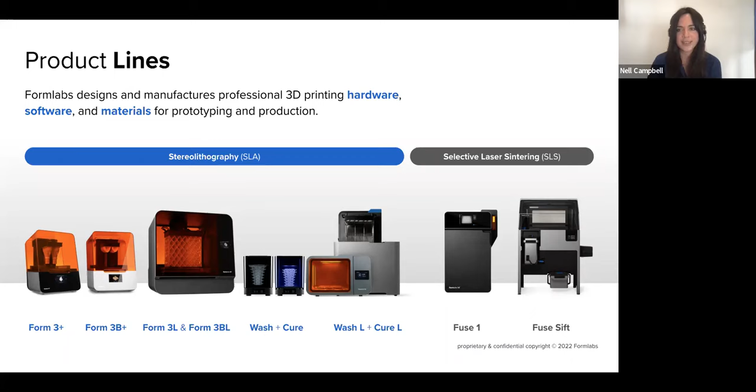So what is low force stereolithography? I thought for those who have been with Formlabs for some time, perhaps you have a Form 2 or maybe you go back as far as a Form 1 Plus, I wanted to just talk about what low force stereolithography is.

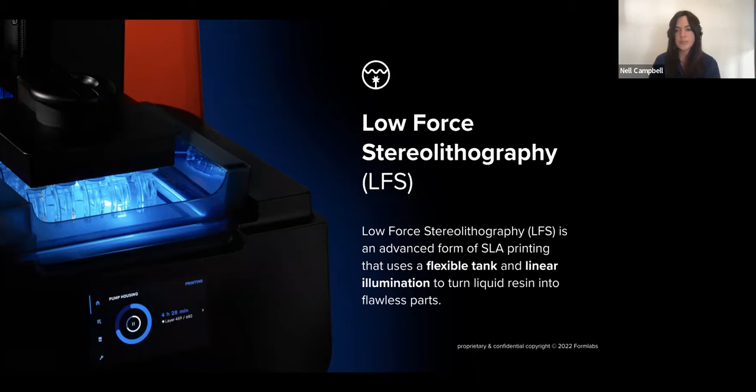So we have our full agenda for you today. We will first go into low volume rapid injection molding, and Juliette will present some use cases. She'll look into the workflow, so what is required to get started. Then we'll explore some user stories from around the globe, and lastly, we'll be looking at your questions live.

So we'll go into the presentation of low volume rapid injection molding. First of all, I just want to ask audience questions. We have a few polls throughout this presentation. The first one is around your familiarity with injection molding and whether you have injection molding capabilities in-house. That will appear on your screen now, please take a second to fill in the poll as it pops up.

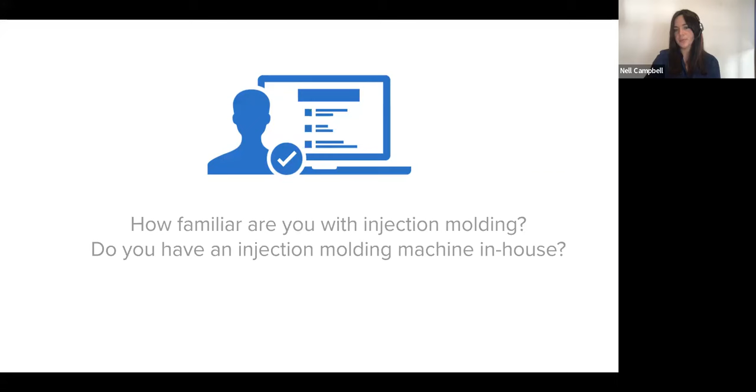Thank you very much. It looks like there's a real mix here. We have about 40% of you that are intermediate, a bunch of you that are beginners, so we'll try and cover all aspects of this in the presentation.

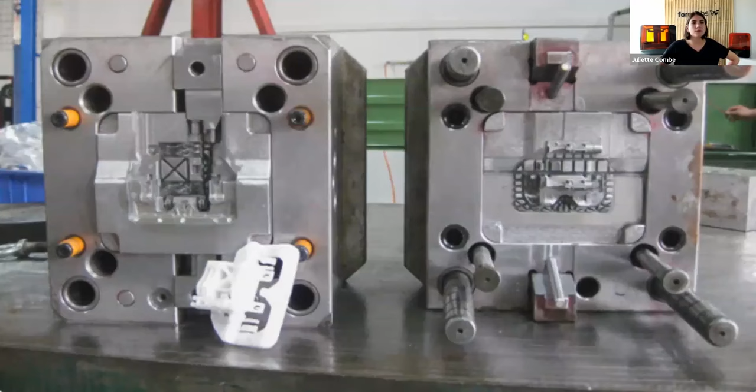Good, all right. You can see on this picture an example of an injection mold. Typically, if you're using injection molding, you're probably producing your mold out of metal machining, and you're probably outsourcing it, as we've seen. Tooling production is usually between $2,000 to about $100,000, depending on the complexity of the mold, the part geometry, and so on.

And it takes about 4 to 8 weeks of lead time if you outsource it. So it is very long delays and very expensive tooling. Usually you get a return on investment on your tooling when you produce large volume, large quantity of units - this is actually mass manufacturing, right? But what if you need to produce limited quantities of units?

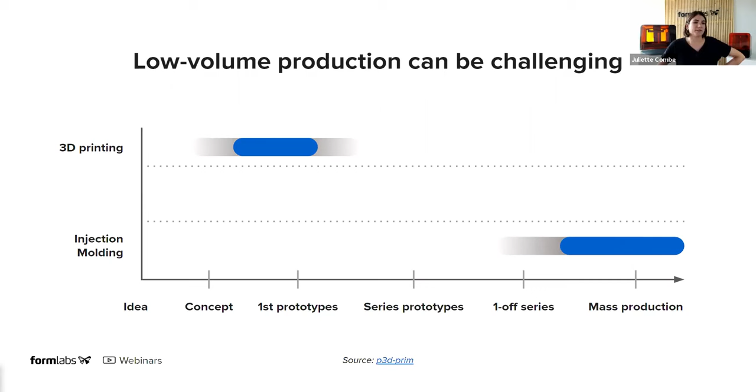3D printed mold can actually bridge the gap between prototyping and production. It's one way to do it, what we call rapid tooling, so that product designers can produce tools rapidly. This is said in the name.

3D printing allows you to rapidly produce molds, either for functional prototypes—if you need to test the material or design before mass production—or for affordable pilot runs, if you need to produce a large quantity of the same prototype to send into the field for environmental testing, or for on-demand production of a limited series of parts.

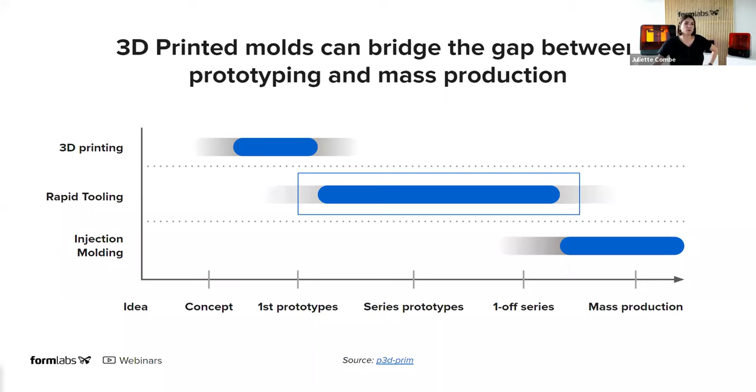So I would like to know why today you were interested in doing low volume production. I guess if you're joining the webinar, it's that you have a need for that today. I would be interested to know what is exactly your use case. So you'll have another poll coming out.

Okay, so actually the poll doesn't exactly match the question, but it's still interesting. It's asking about the volume of production you're doing or planning to do with 3D printed molds today, so it's pretty related anyway. Interesting, I see that 50% of the audience is planning on doing less than 50 parts—likely small or functional prototypes. Then about 24% between 50 and a hundred parts, another 25% between 100 and 1,000, and almost nobody looking for more than 1,000 parts. So the majority is under 50 parts.

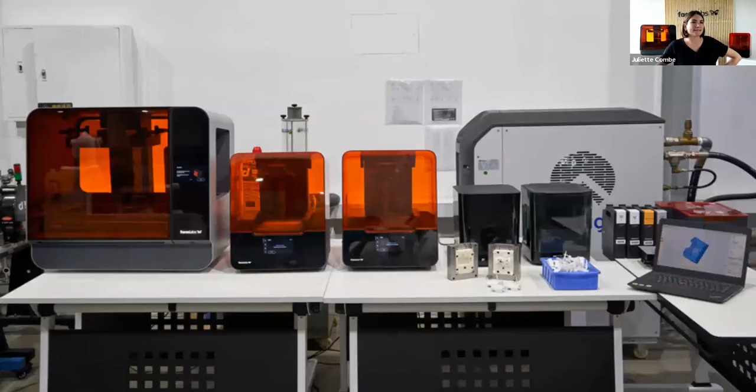Nell already introduced Formlabs for those who don't know the company. We manufacture desktop 3D printers, and desktop 3D printing is a powerful solution to fabricate tools rapidly and at low cost, because it's easy to implement, operate, and maintain. It requires very limited equipment and saves CNC time—if you're using CNC today, you know it's painful, needing programmed cam files and skilled operators. You can save that labor for higher-value tasks and use desktop 3D printing for rapid tooling, iterating quickly and accelerating product development.

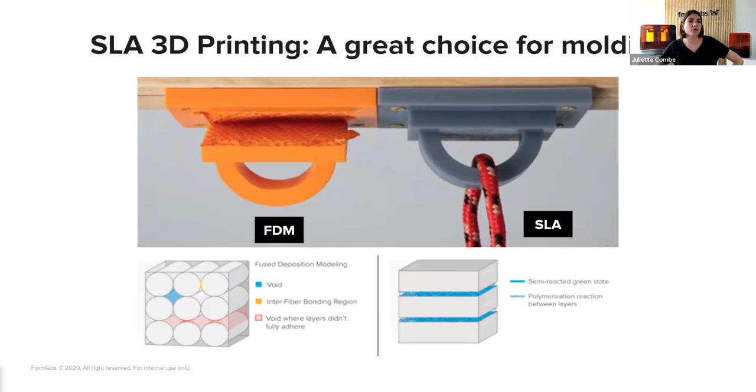Most of our users use SLA 3D printing—this is a picture of our Form 3 and Form 3L. SLA is a great choice for injection molding. It stands for Stereolithography, one of the 3D printing technologies, characterized by smooth surface finish and high precision that transfers to the final part. The molds transfer all the detail, so if the mold is accurate and high-detail, the final part will be too. It also facilitates demolding. SLA parts are chemically bonded, giving isotropy—they're fully dense, which helps produce functional molds. At Formlabs we develop high-performance materials that can withstand the high temperature and pressure involved in injection molding, which is why this is what we recommend for injection molding with 3D printing.

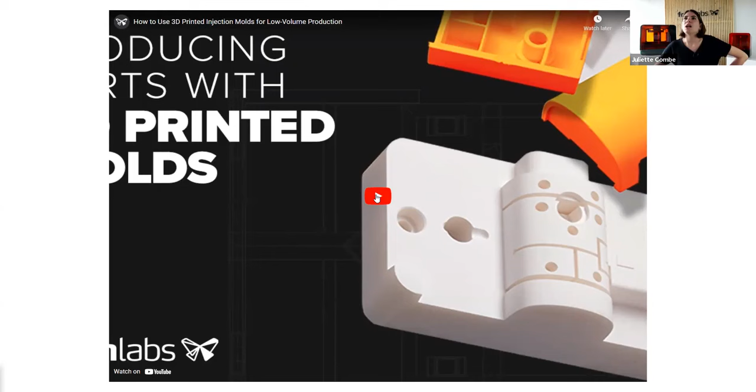Now I'd like to show a short video made by one of our partners, Multiplus, using a 3D printed mold. I'll run it to show the whole workflow from designing and 3D printing to using it in the injection molding machine. They used a Babyplast machine in-house to produce about a hundred parts.

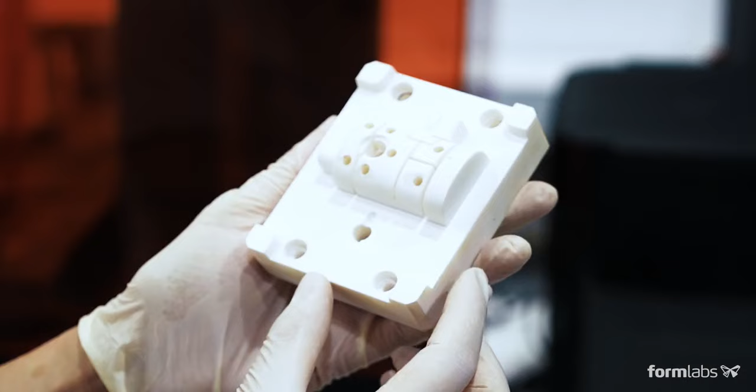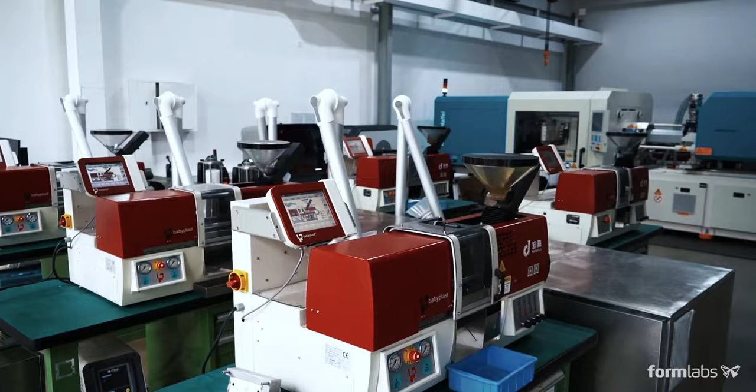Using 3D printers to fabricate molds for low-volume injection molding can reduce costs, shorten lead times, and help bring better products to market. Founded in 2005, Multiplus provides manufacturing services to over 250 clients per year, many of which require small batch production. We've partnered with Multiplus to walk you through the steps of the injection molding process using 3D printed molds.

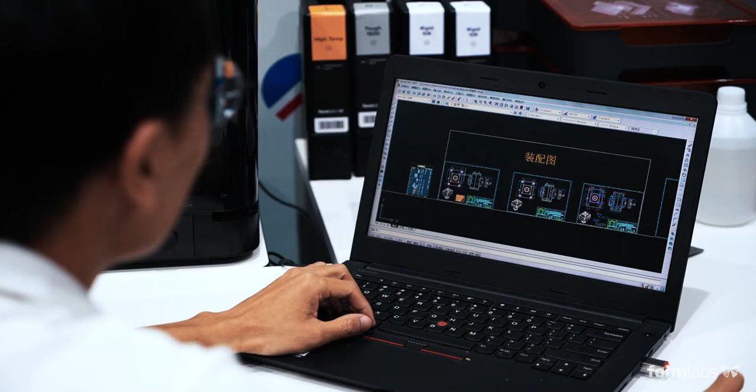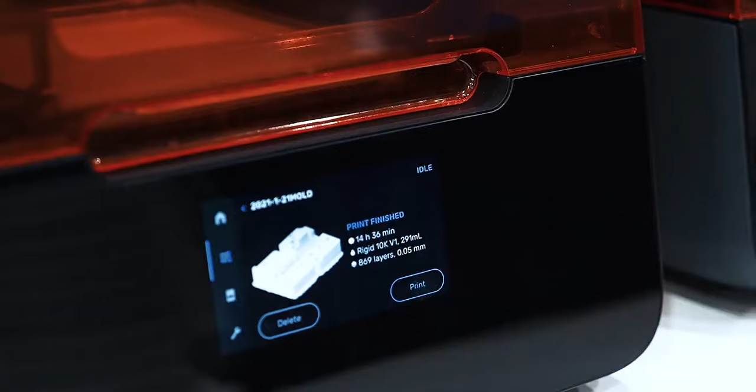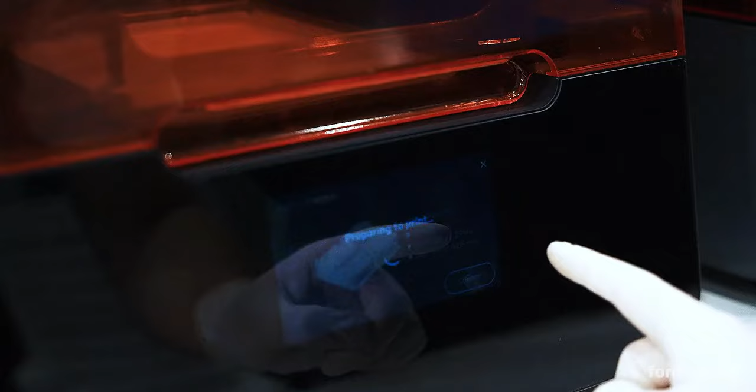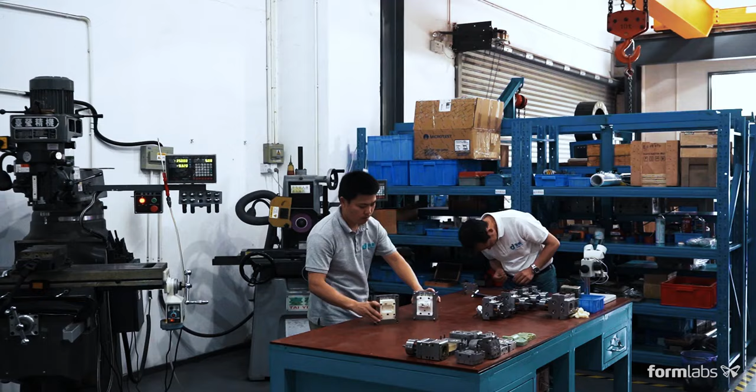Begin by designing the mold using common design-for-manufacturing principles. 3D printed molds can incorporate the same components as metal molds. Upload your design into Preform, Formlabs' print preparation software, prepare your print, and send it to the Formlabs 3D printer. Choose a material and begin the print—Rigid 10K resin combines high strength, stiffness, and thermal resistance, making it an ideal material for injection molds. All SLA 3D prints require washing and post-curing to bring parts to their optimal mechanical and thermal properties. In just a few hours, your 3D printed mold is ready for assembly. These molds are often designed to fit within standard metal frames, which extend the lifetime of the mold. Prior to assembly, you may choose to sand or machine the mold to meet critical dimensions.

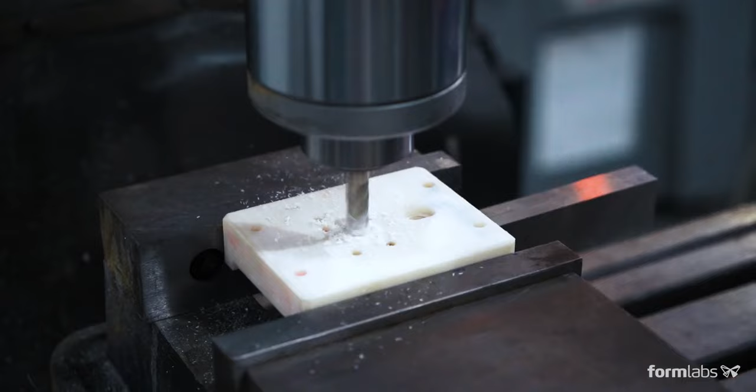Assemble the 3D printed mold inside the metal frame. Ejector pins can be added to automate demolding. The mold is now ready to be used.

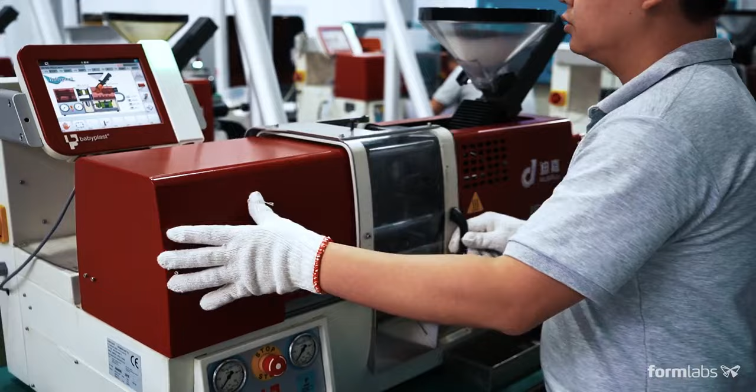Install the assembled mold in your injection molding machine. Insert the plastic pellets, input the required settings, and begin production.

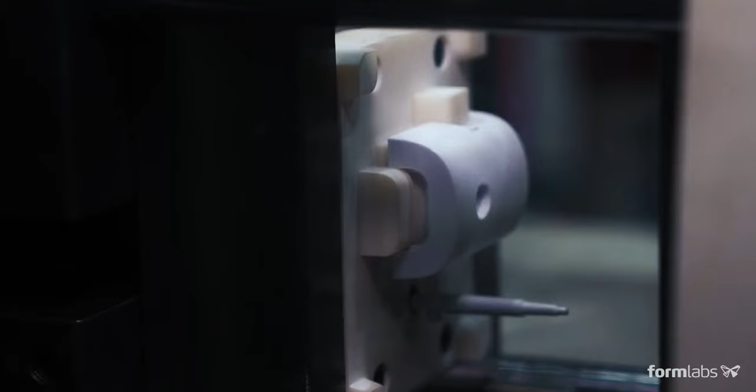Formlabs 3D printed molds are capable of withstanding hundreds to thousands of shots, depending on the part design and molding conditions. Using compressed air can accelerate cooling time, which is typically longer with plastic molds.

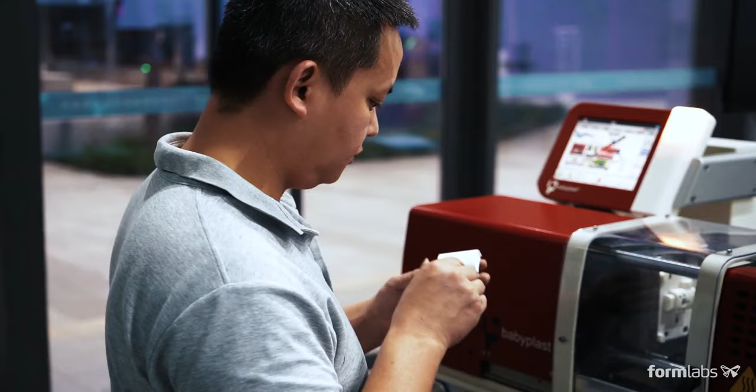Whether you're looking to design functional prototypes with end-use materials, fabricate pilot production parts, or manufacture end-use parts, using Formlabs 3D printers to fabricate injection molds is a cost-effective and quick way to produce parts in limited quantities.

Obviously, there are some considerations to take when you're using a 3D printed mold instead of a metal mold, because as you can imagine, a plastic 3D printed tool is much more fragile than a metal tool.

We have to try to reduce the impact of the pressure, of the temperature, of the demolding, and some materials as well can be very abrasive on plastic 3D printing.

This is what we gathered from different research and customer feedback, different types of recommendations on the design and on the process itself. So we have a lot of different resources that can help you. We actually have a web page on our website dedicated to injection molding.

Nell is going to post all these resources in the chat. We have an injection molding white paper with design guidelines, methods, and case studies from different users. This is more like a comprehensive piece of content, but we also have a short quick start guide.

Just a few pages that can really help you on the go. And we also have some different user stories and an FAQ blog post and so on. So we're just going to post all those resources that can help you in different situations.

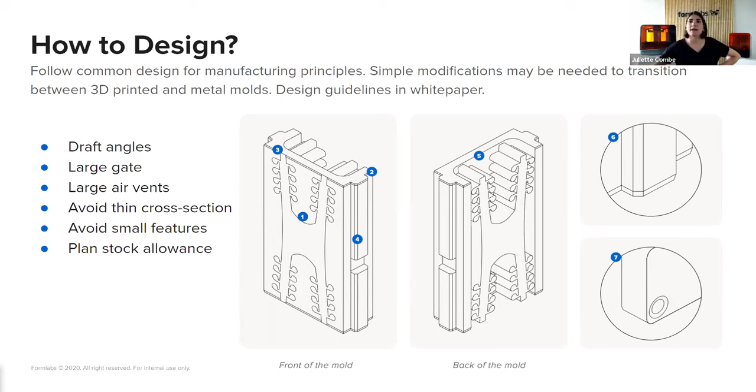We also have a webinar that we've done with design - it's a design masterclass. We've done that with a teacher from a technical college in the US that is teaching how to design injection molds.

So to teach that, he actually has been using a Formlabs printer, and is just helping his students understand a bit the process with 3D printed molds.

So how to print - after you design your mold, you print it. We recommend using the Rigid 10K resin, which is one of our resins that is a highly glass-filled material.

It has a very high HDT of 218 degrees C. And so it makes it very thermally stable, but also very stiff. So it's our best material for injection molding.

As I mentioned before, you can post-treat the mold either by just grooming it with sandpaper to have a perfect flatness, or with sandblasting which also helps achieve a good surface finish. This is already a very matte aspect and very smooth surface finish, but there's always some more we can do.

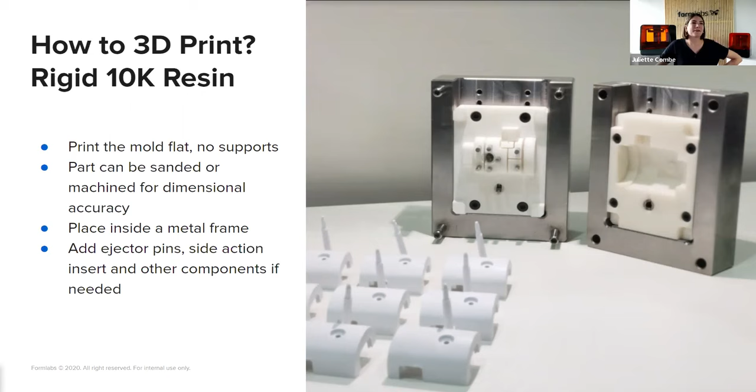And you can also use some recommendations like printing the mold flat, not using supports on the molding surfaces. This is very important. So if you can avoid that, that will really help achieve the best quality.

So we've gathered a lot of different feedback from customers, because the results of using 3D printed molds for injection molding really varies depending on the geometry, the material you're injecting, the temperature, the pressure, and how many parts you're looking for. So we've gathered a lot of different feedback on part geometry and material here. This is all gathered in a table of process conditions, which you can also find in our resources. It's ordered by material, so if you're looking for a specific material, you can see if one of our users has done it, and how many parts they got.

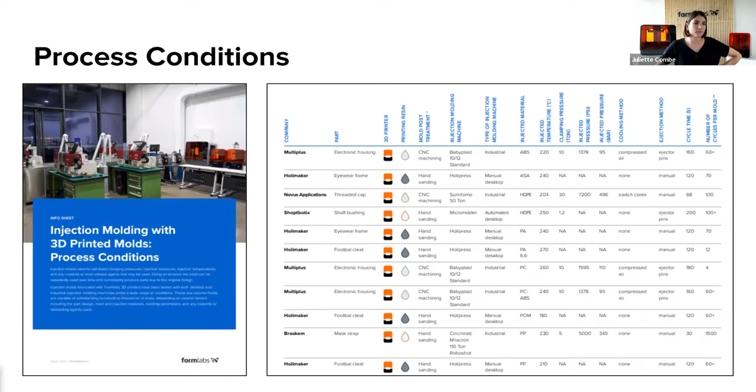Here I try to summarize a bit of all those findings. What I really want to stress is that it really depends on the geometry and the situation. So we cannot really say with a 3D printed mold you can do that many parts, or this is the result for sure you're going to get. It will always depend on the part geometry and what you're trying to produce.

But what we've observed is that injection up to 250 degrees gives really good results, about hundreds of parts in terms of mold longevity. Over 250 degrees, we've had some results, but more about tens of parts, so the mold will deteriorate much faster. We have not tested over 270 degrees.

In terms of material as well, polypropylene and polyethylene are materials that are very easy to process, at about hundreds of parts. We've even had thousands of parts for some very simple designs with polypropylene. But for materials that are a bit more challenging, like PA or PC, we've seen only about tens of parts. So this is a bit of a reference for you to understand what your expectations can be.

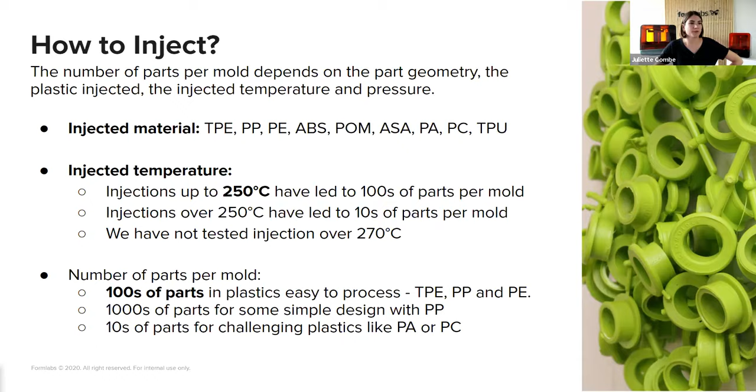We've also tested a lot of injected material, as I showed here, but again, this will always depend on your own geometry. So we have the next poll coming up.

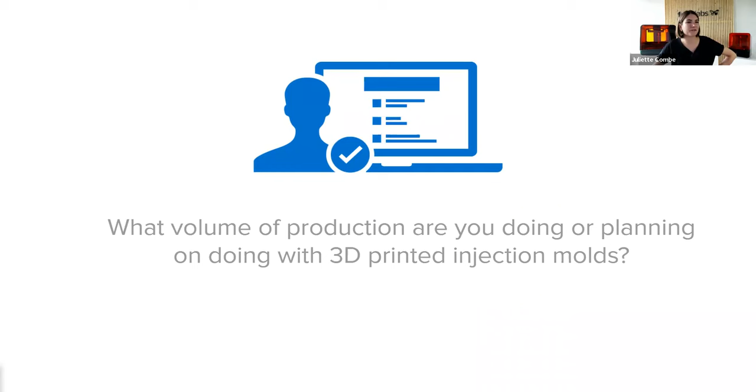So I'm just going to jump into the user stories now. I want to show you some concrete parts and some concrete examples of users who have been using 3D printed molds for their projects and for their business.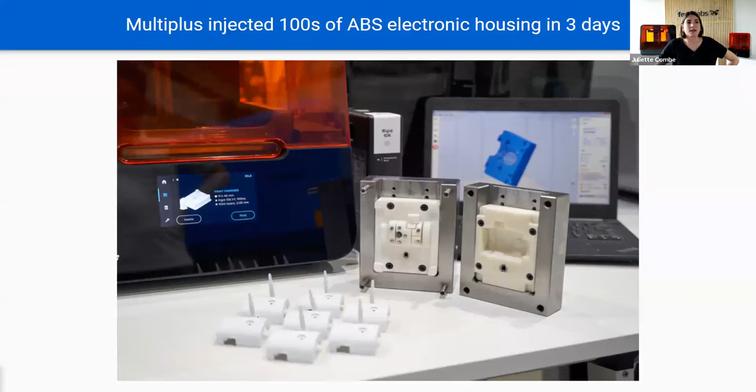The video we showed before from our partner Multiplus was made with a rigid 10K mold. It is placed inside a metal frame, which is really something we recommend to absorb as much pressure as possible from the process. They injected ABS, but also polypropylene and some ABS and PC material. They were manufacturing electronic housings, and doing that in just a few days.

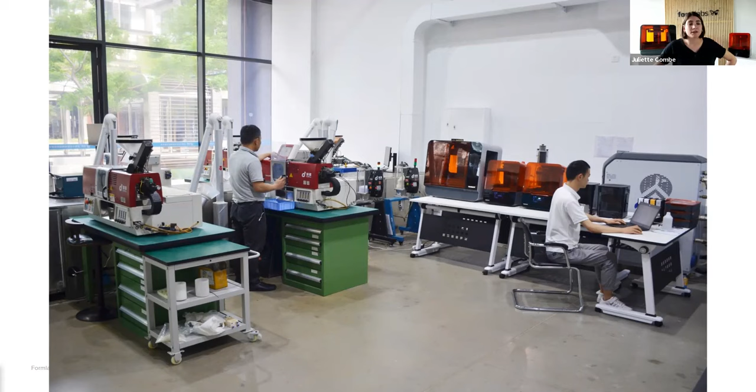They've been doing that on the Babyplast machine, which is a small-scale, fully hydraulic injection molding machine. This is a very powerful machine that is great for low, mid-volume production and up to high-volume production of small parts. This is a picture of the design, just to give you an idea.

Another example is from one of our users, Novus Applications, a product development firm who are experts in injection molding for many years. They've been producing hundreds of bottle caps with polypropylene and HDPE, and what's interesting is they've been using a 3-part mold with a side action threaded core.

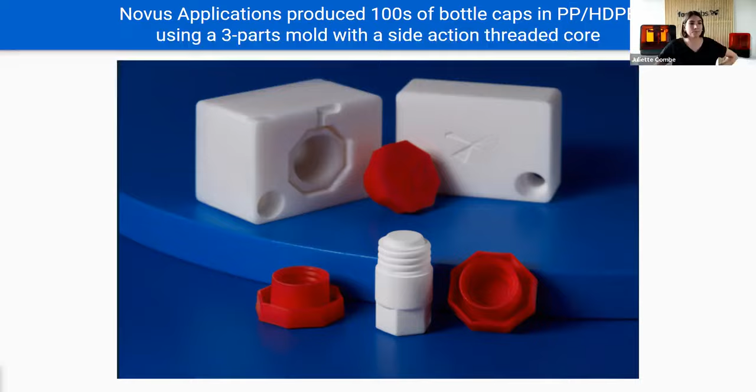I know it's a question that comes up quite often, whether it's also possible to use a side action core with a 3D printed mold. This is a great example, and they managed to get about hundreds of parts with that, even though it's a very delicate part. So these are some pictures of the geometry to give you an idea of what is doable.

The next example is from the company Braskem, a material supplier that fabricated thousands of end-use mask straps in polypropylene within a week. They were really under time constraint, very stressed by time to produce about 1,000 mask straps for their employees.

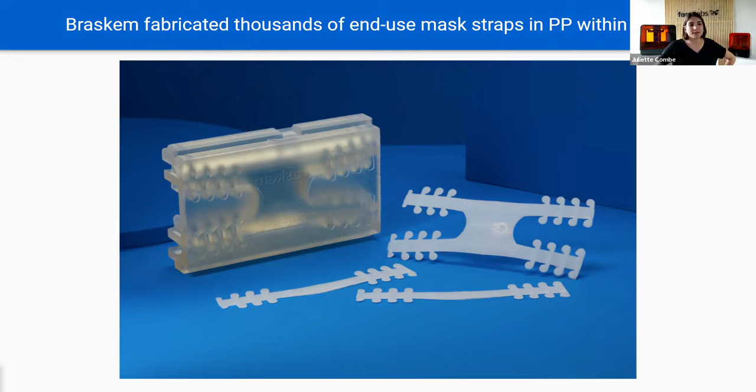So this is not a prototype, this is an end-use part. With a mold of very simple geometry, they managed to produce about 1,000 parts. They were using an industrial press that is all automated, all electric. This is an example of the geometry of the mold, which you can also find in the design guideline. They gave a lot of recommendations on how to save resin as well and how to decrease the pressure inside the cavity.

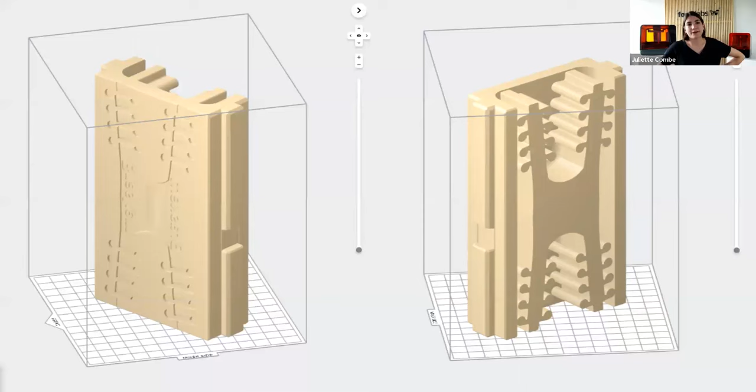And they were only using a mold insert that they slide into the injection molding machine.

Another case is from the Technical Center specialized in plastic and composite, IPC, in France. They injected about a thousand parts of polypropylene with a mold printed in Rigid 10K, a mold insert placed into a frame in nylon. It's interesting because they also included very fine texturing.

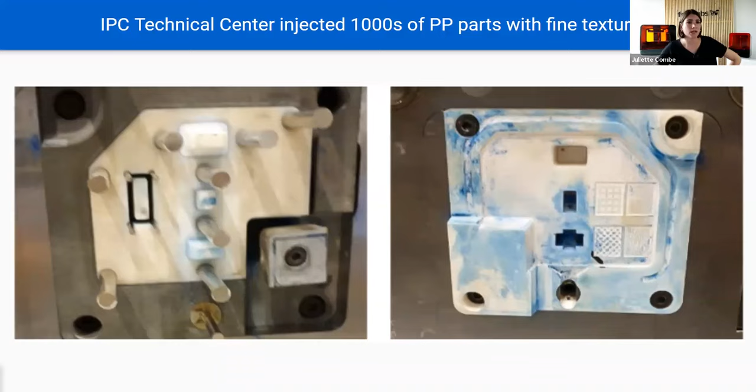I'll show you more pictures. You can see here they've tried some other materials, but you can see they had some torture test parts with different features they wanted to incorporate, and some different inserts. They wanted to see the render of a fine texture on the parts.

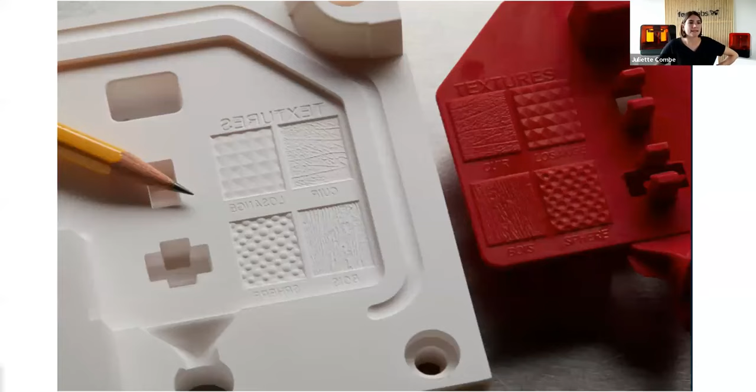So here is the mold for Rigid 10K with very fine texturing, and on the right the final parts. They were also injecting in the research center with very industrial equipment.

What I want to finish on is, if you're not having injection molding in-house, and if you just want to get started and are a beginner, you also have solutions for desktop injection molding machines. This company is called Holimaker. They make a very small manual press, very easy to start with and accessible. They are using our printer to produce the mold.

This is also an example of Rigid 10K. They've also been using other materials, and they produce limited series, about hundreds of parts as well, for their customers to help them develop small series, pilot runs, prototypes, and so on.

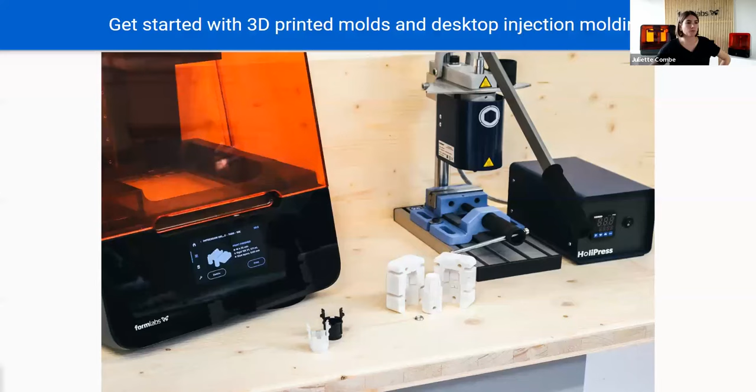So again, another example of a geometry. They've also been producing this kind of face shield clip that you can see here, a bit more complicated mold with different parts that assemble, and some examples of wearables as well. This is an example of a frame for eyewear.

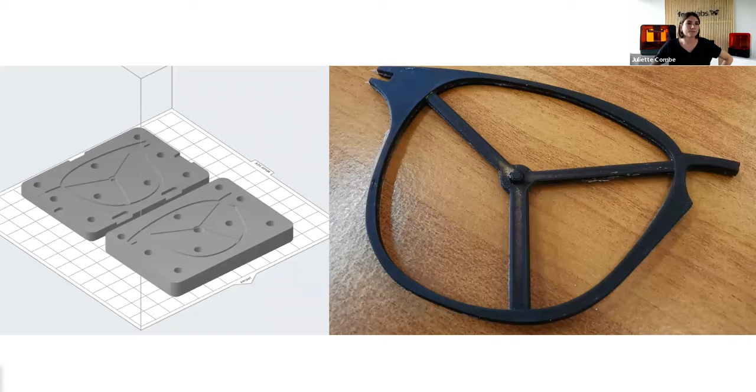And finally, another example from a product development company, Glassboard, that also injects more complicated materials, some TPUs, for producing prototypes, about tens of prototypes. They're also using a manual desktop press in their prototyping lab. They use a lot of different projects for prototyping, and for them this is a great way to reduce time to produce the tooling.

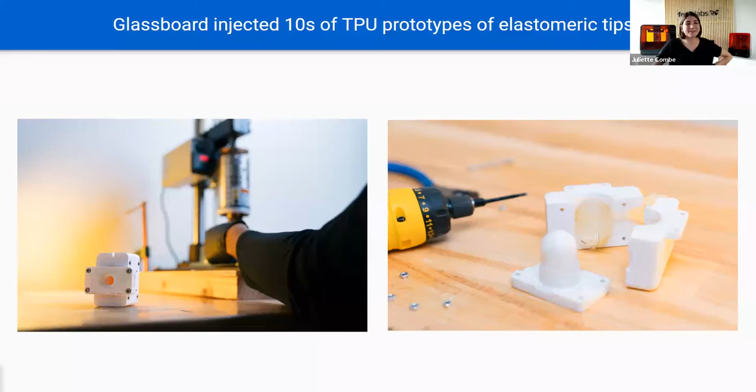Thank you very much, Juliette. That was a great presentation.